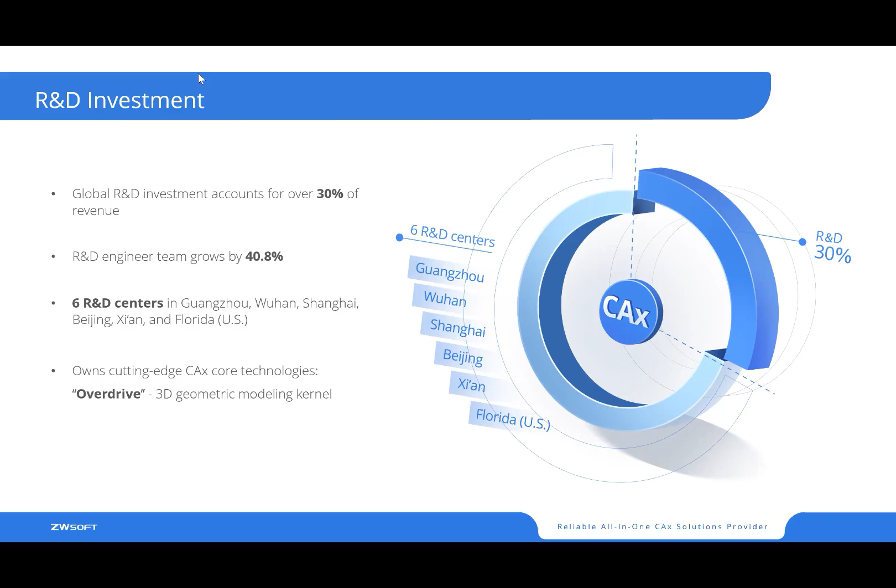We now own cutting-edge CAx core technologies. This Overdrive makes our product more stable and reliable, and this technology is one and only in China. We now have over 260 partners from over 90 countries and regions to bring our products to all the global users.

We would like to invite you all to spread the network together with us. We aim to build up a CAD ecosystem for all the customers, users, partners, third-party developers, and industry-academia research collaborations. We provide reliable products to all the users. Partners will spread the network with us. Third-party developers from various industries assist us to optimize our software functions. We also collaborate with industry-academic research to promote engineering software innovation. This strong ecosystem unites everyone together to make our industry grow faster and stronger.

Our third-party developers are from various industries, such as survey, civil, interior design, general tool, etc. For example, GTX company is one of our third-party developers, also our eco-partner too. Thanks to all the partners like you all, we've been able to build up a strong CAD ecosystem together.

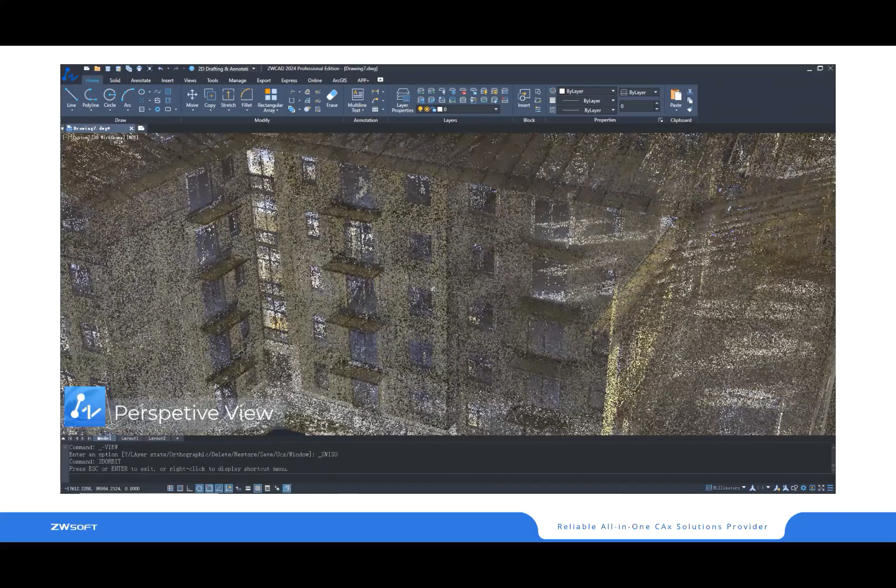ZWCAD is able to import point cloud data now. And with the enhanced 3D view, we can easily rotate the view to our desired angle. There is a plan cut panel as well as section cut for you to cut through the building, to cut through the point cloud data.

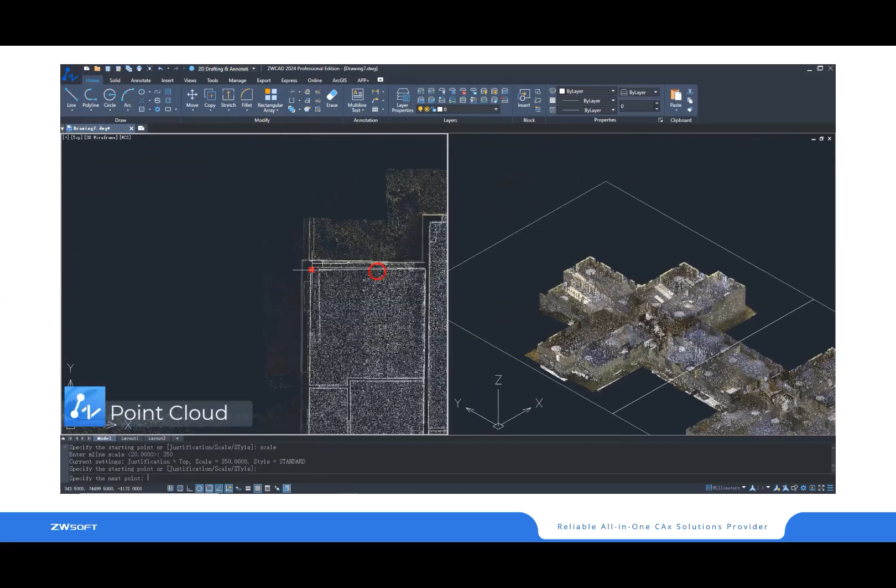So you can trace the architectural floor plan. Here in the demonstration video, you can see after we use the section cut, you can easily trace the point cloud data to create your own architectural floor plan.

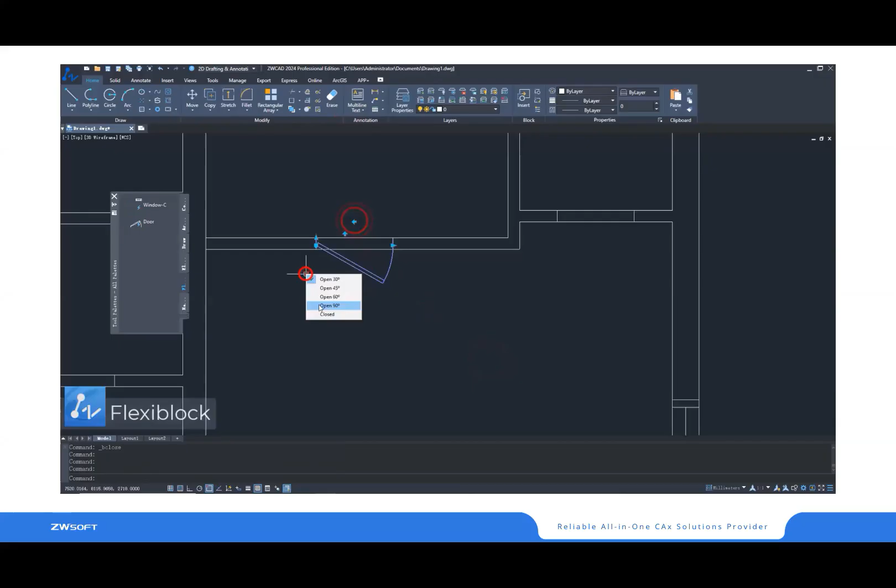And after you finish tracing the architectural floor plan, you can use the tool palette and insert the flexi block. Flexi block is a block with parameter constraints similar to the dynamic block. You can add actions to the block, and you can also change the block according to the parameter constraints.

We have also added the quick properties panel, so you can easily check and modify the color of the entity or the layer.

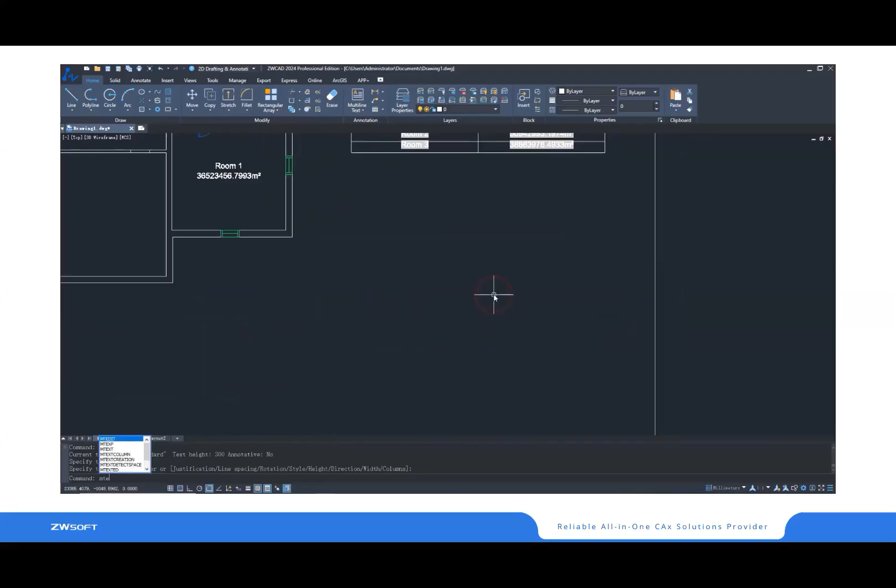With the area table for the architectural floor plan, ZWCAD can quickly calculate the room area and generate the result table. Following that, the new MText function, the multi-line text function, provides more useful tools for you to add your text descriptions.

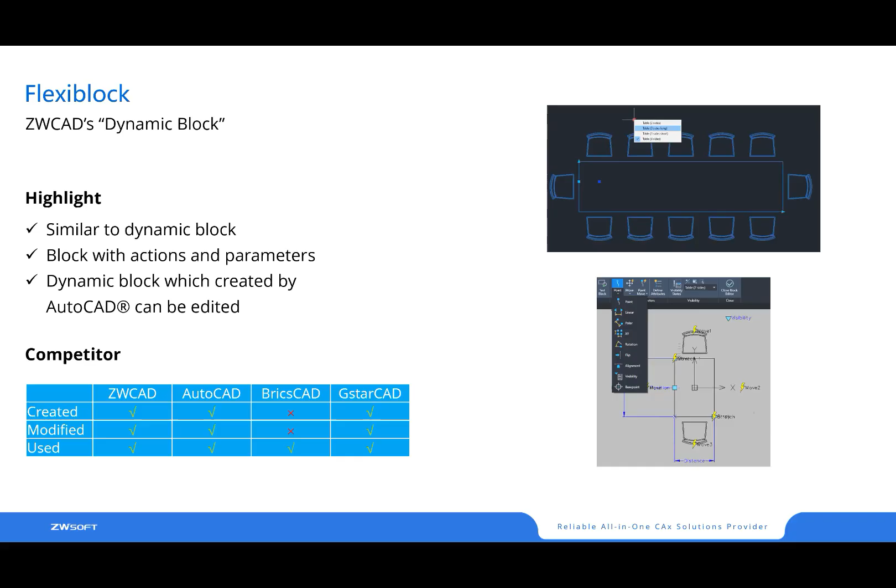After watching the overview demonstrations, the first exciting feature I would like to share is our flexi block. Flexi block is very similar to the dynamic block in AutoCAD. You can add actions and parameters to the block. And with the flexi block, now dynamic blocks imported from AutoCAD can also be modified and used in ZWCAD. Let me show you the flexi block and how to create one.

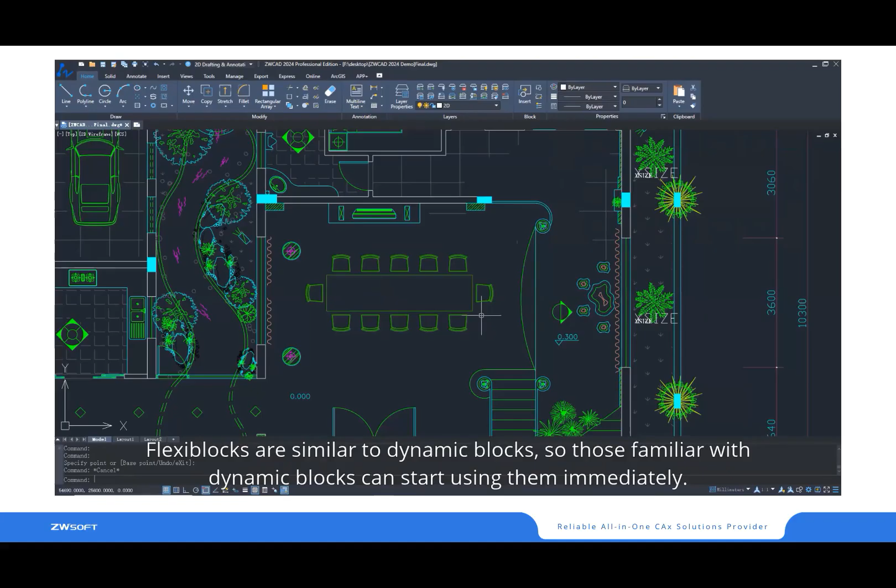This is the table with chairs on the architectural floor plan. We can adjust the table and the seats based on our needs, thanks to the flexi block in ZWCAD 2024.

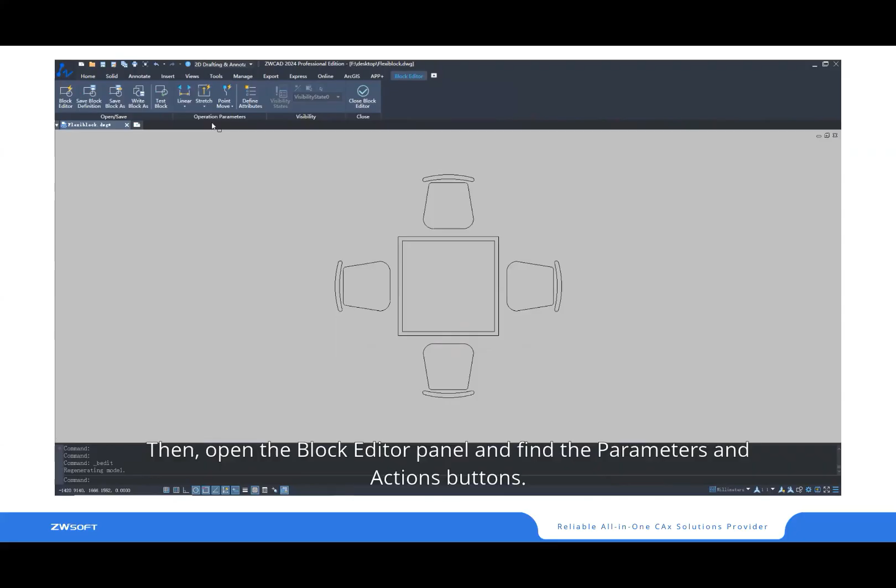To create a flexi block, first we need to create a normal regular block. Following how you create a normal regular block, you can double click into the block to enter the block editor.

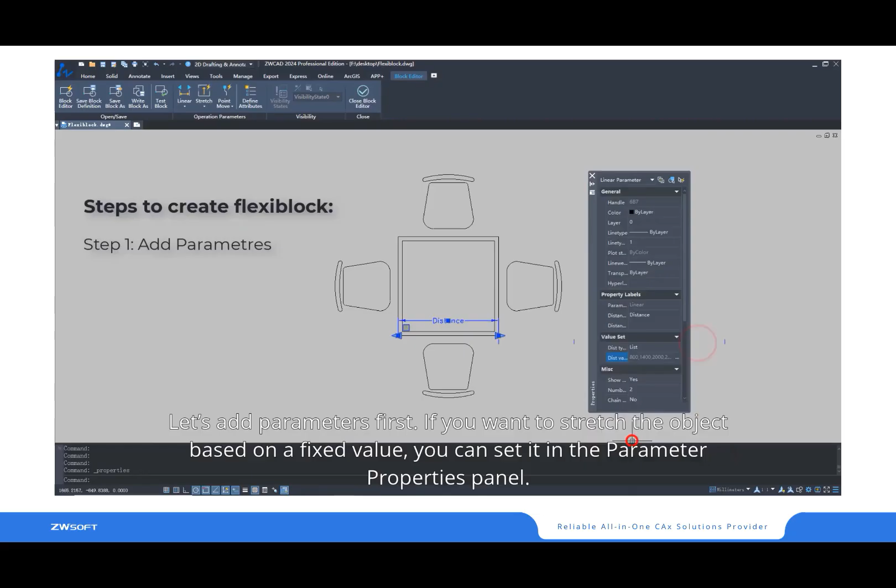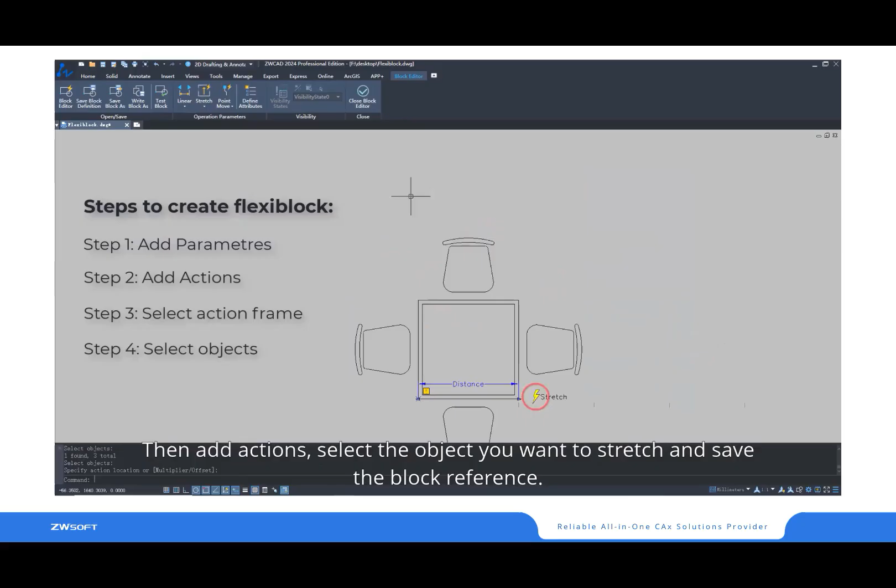Here in the block editor, we can add actions and parameters to the flexi block. Here we just add the actions with the desired distance, so that when we drop the flexi block, when we drop the table, it can automatically draw all the action or the distance.

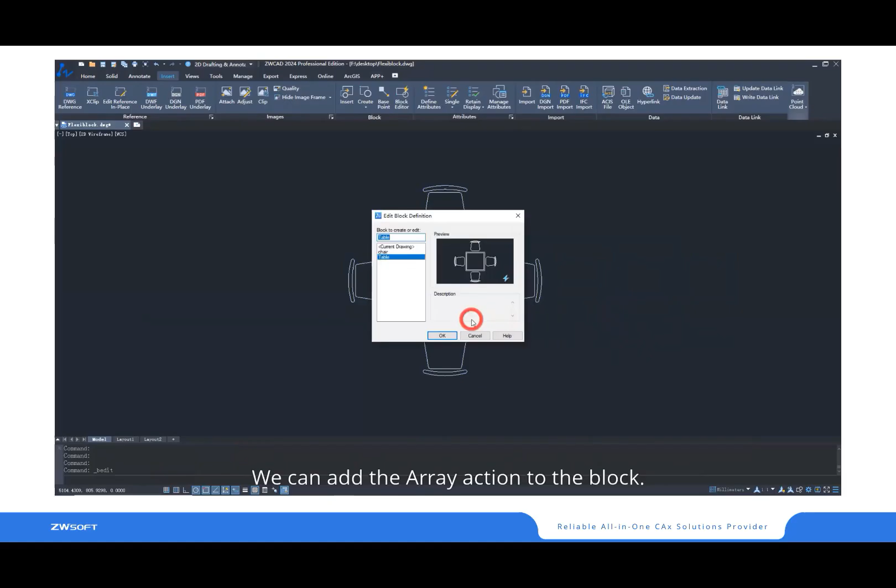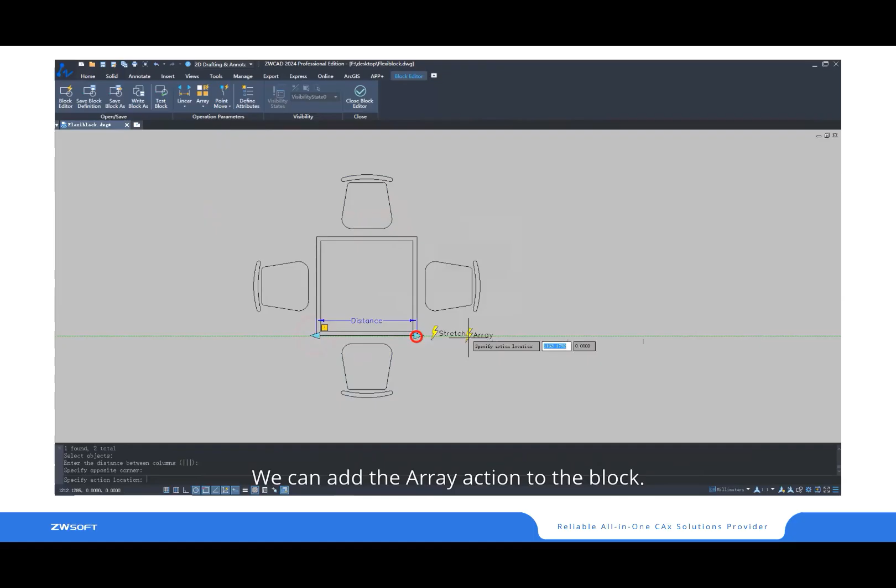And then we add the stretch actions to the table. So we finish creating the flexi block. We can test the flexi block. Now we are able to draw or stretch the table according to the distance we just added to the flexi block.

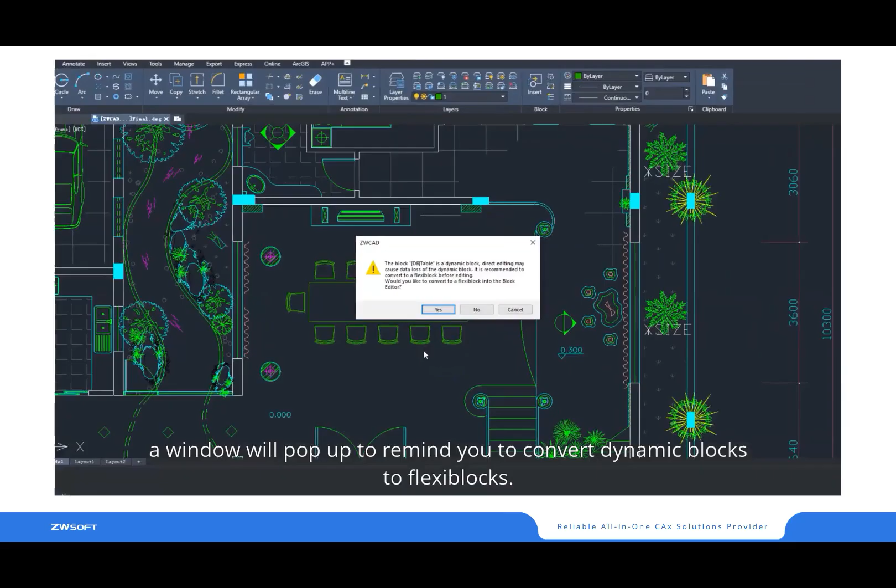And then next, we can also add the array command to the table and to the chairs.

When we test the flexi block again, when we drop the table, when we restructure the table, ZWCAD will automatically add all the chairs to the flexi block.

If the dynamic block was inserted from AutoCAD, when you double-click the block, ZWCAD will ask you to convert this block into a flexi block. You can confirm yes and modify the block as a flexi block.

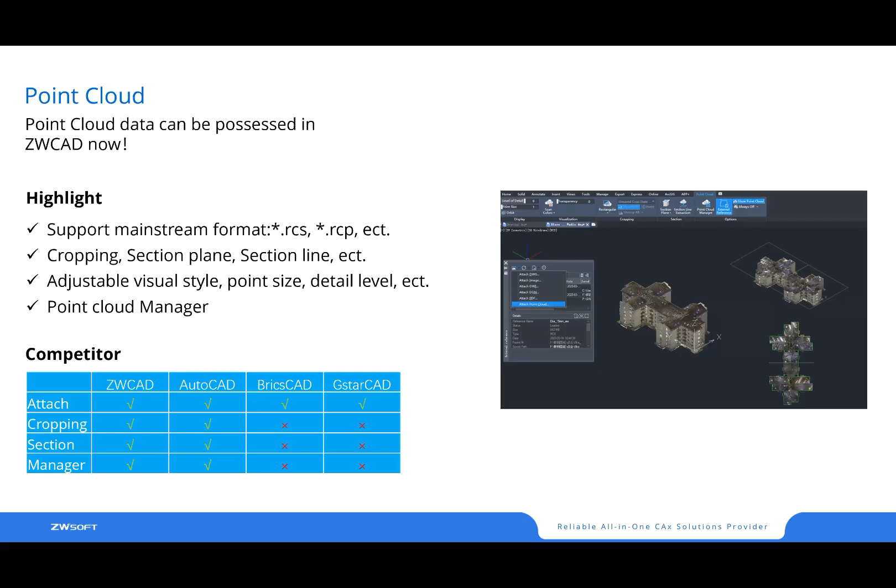The next feature to introduce is point cloud. You can now import point cloud data in ZWCAD. We support mainstream formats like RCS and RCP, and you can use cropping, section plane, and section line tools to check the point cloud data, or adjust its visual styles.

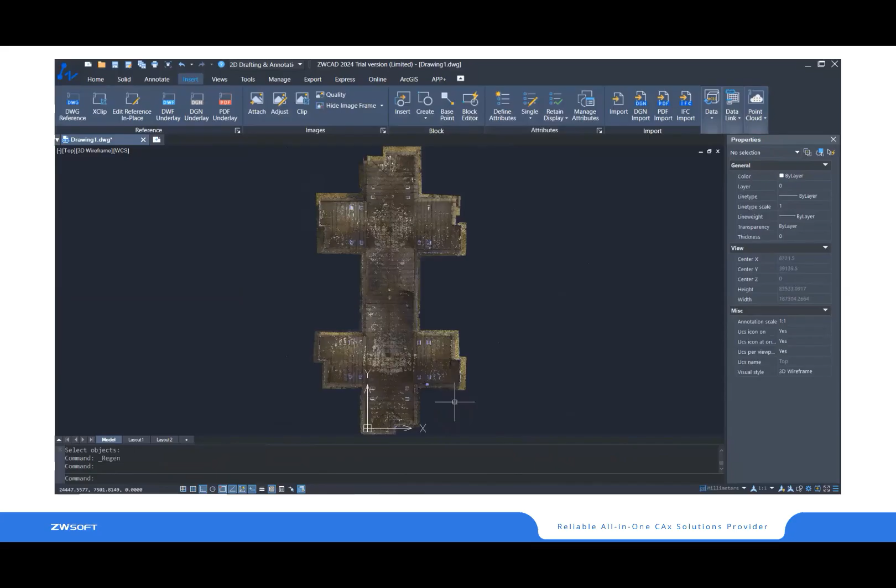Let's check out the point cloud feature. You can import the point cloud file in ZWCAD. Here, you can just attach the point cloud data to the model space.

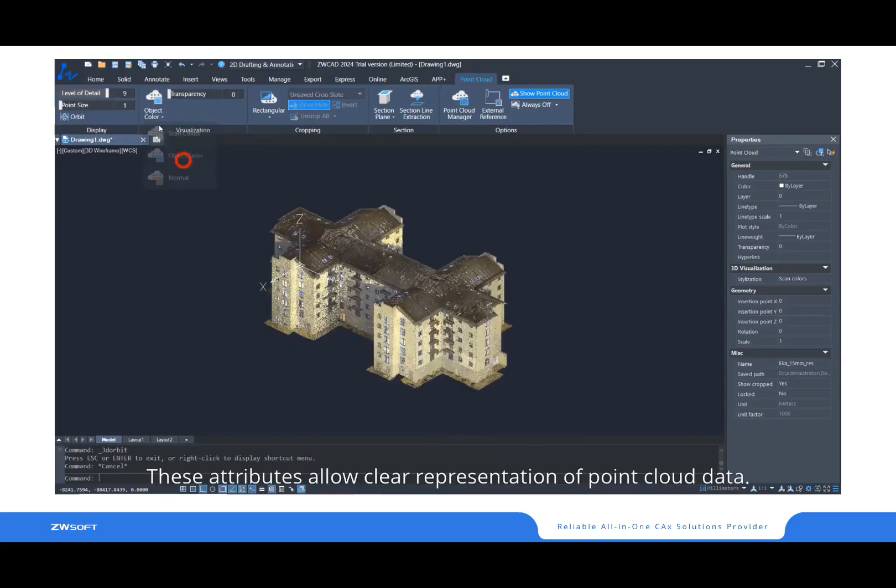We also improved our 3D rotate experience. So after you import your point cloud data, you can very smoothly rotate your 3D view to adjust it.

The point cloud data can be modified in its visual style, like the level of detail, the point size, and the transparency. You can adjust all the visual styles as your needs.

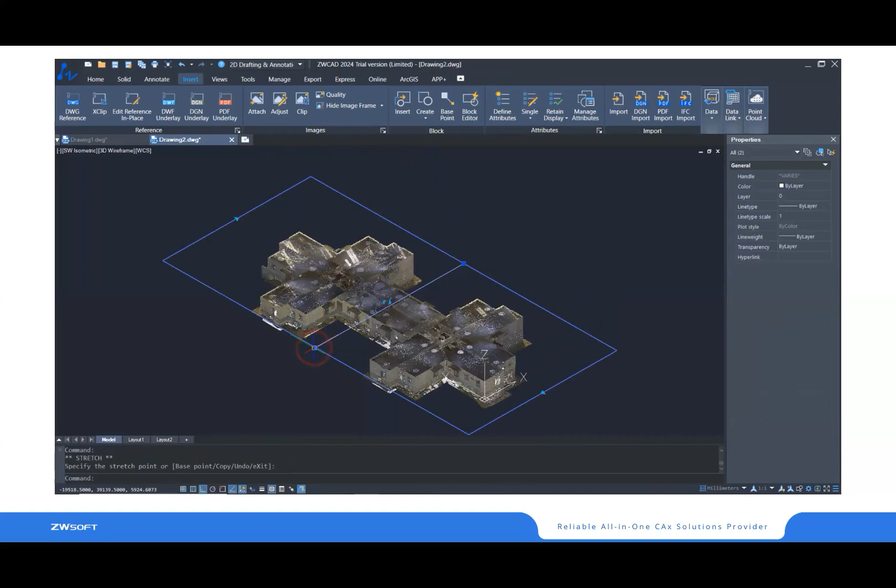You can also change the visual color for your own design style.

There are also cropping tools to create a crop area so that you can hide the other part of the point cloud data.

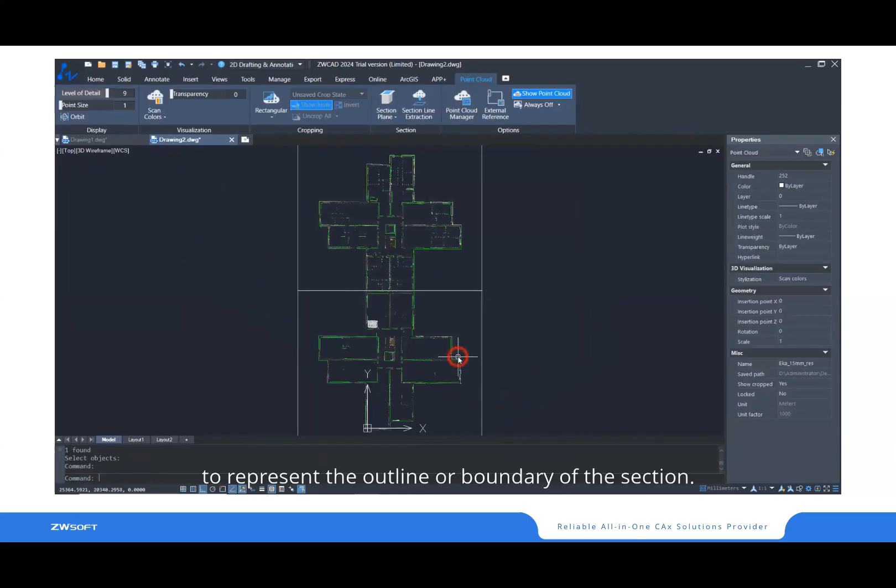We also have the section plane to create a section cut to the point cloud file, like it shows in the video, how we can cut through the building plan.

We can also adjust the height of the section cut, so we can decide which floor we want to cut through in the building.

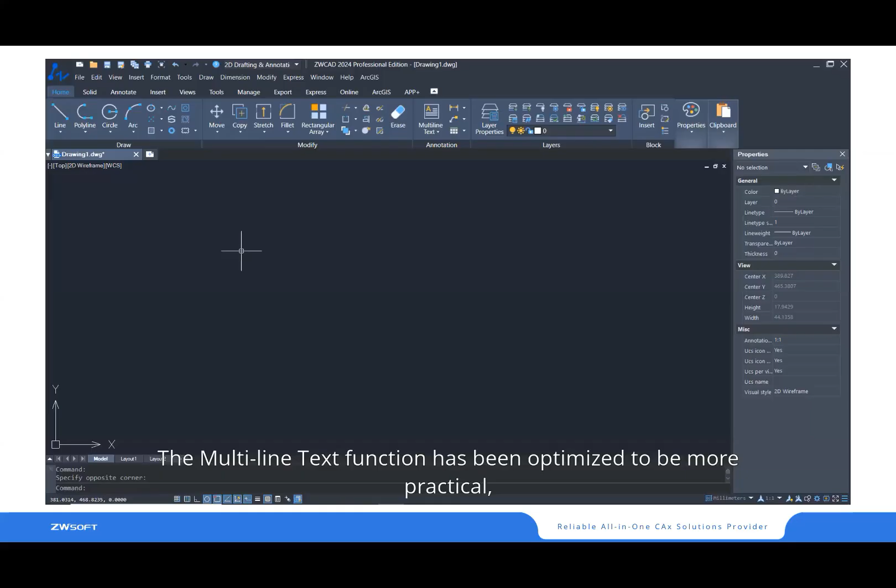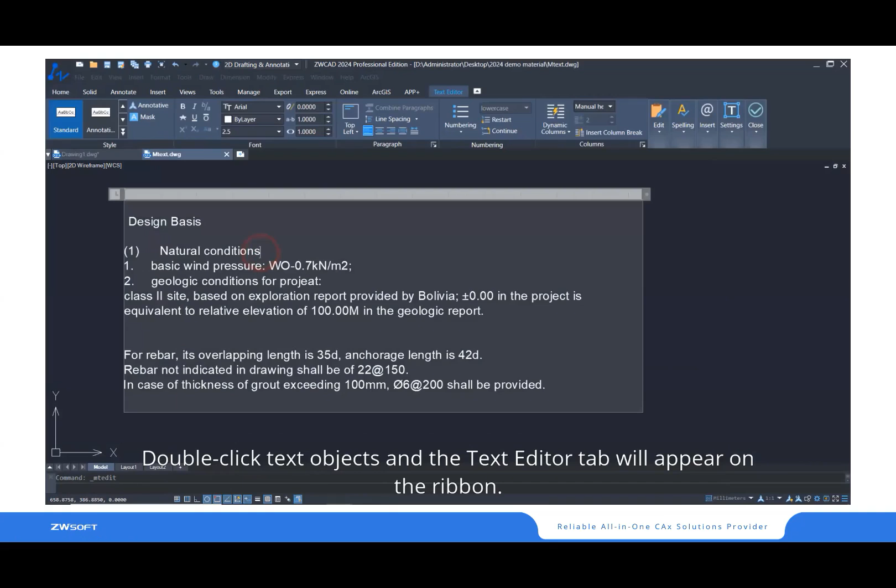With the section line tool, we can also extract the line work to create a floor plan drawing based on the section plane, so that you don't have to draw or trace the building walls. ZWCAD will automatically generate the wall for you so that you already have the building plan.

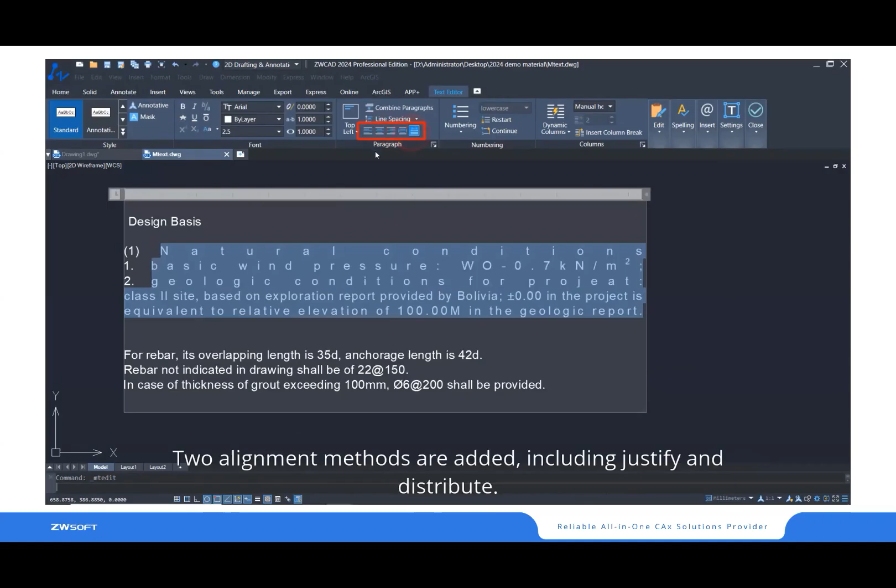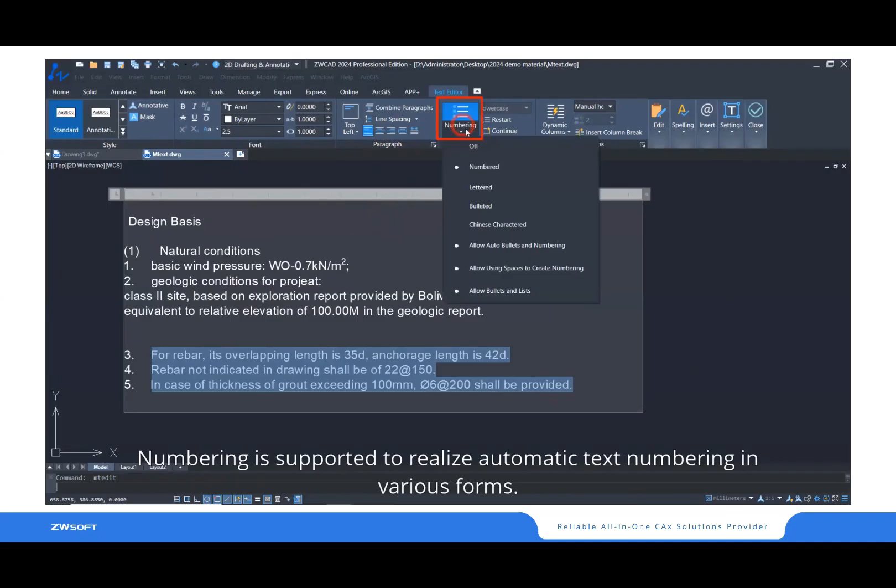ZWCAD 2024 has also enhanced the MText function, which is the multi-line text. Now we support auto-numbering function, dynamic columns, and more alignment tools for multi-line text, as well as spelling check for your text.

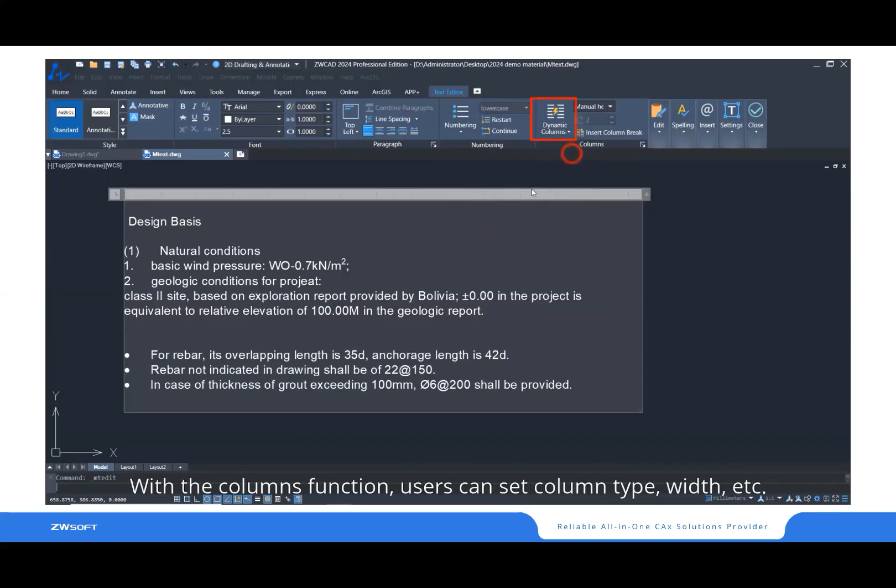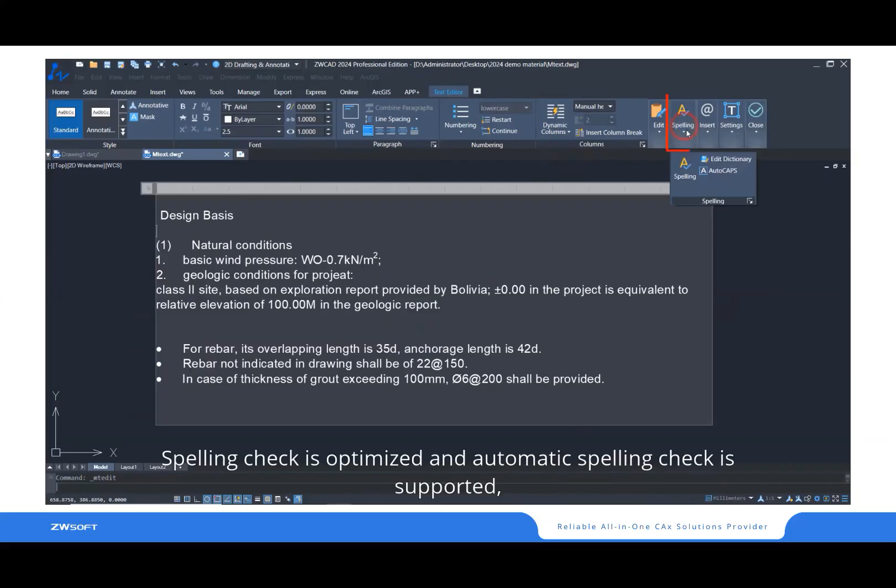Let's take a look at the MText function. Now we have expanded our text editor to the whole ribbon space, to provide you more editing tools on the top.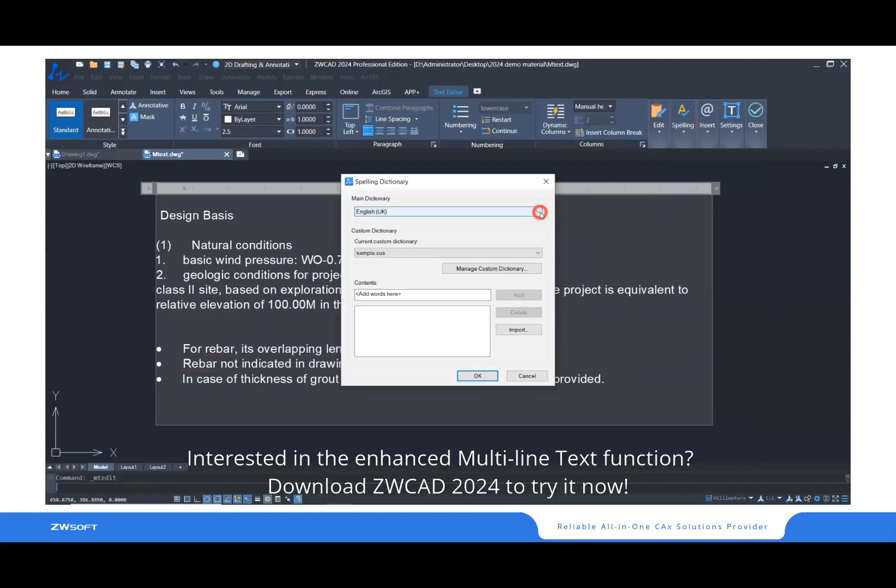ZWCAD now provides more alignment tools and also the auto-numbering function, so that you can adjust the text alignment as your desired style and create auto-numbering without inputting numbers for your rows yourself.

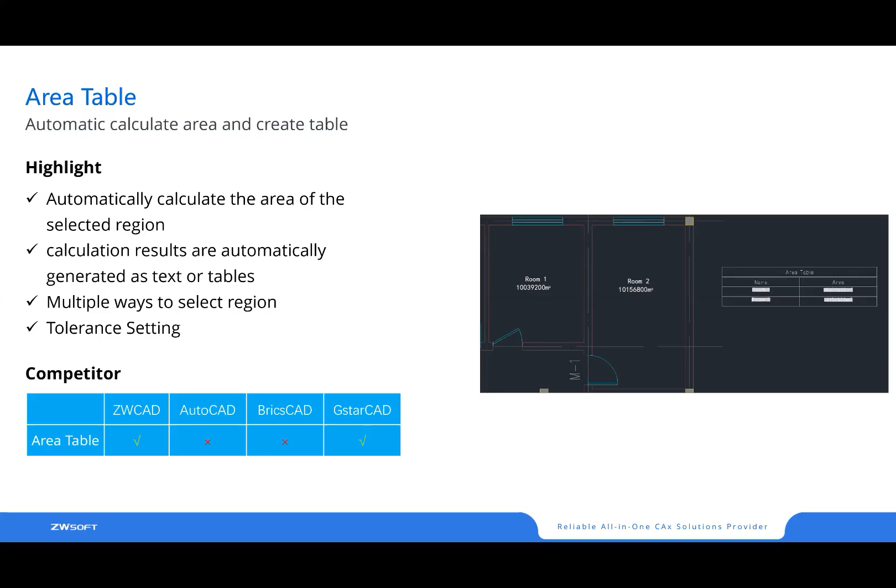You can also adjust the auto-numbering to letters or to bullets. And with dynamic columns, ZWCAD will automatically adjust the multi-line text to fit into two separate columns.

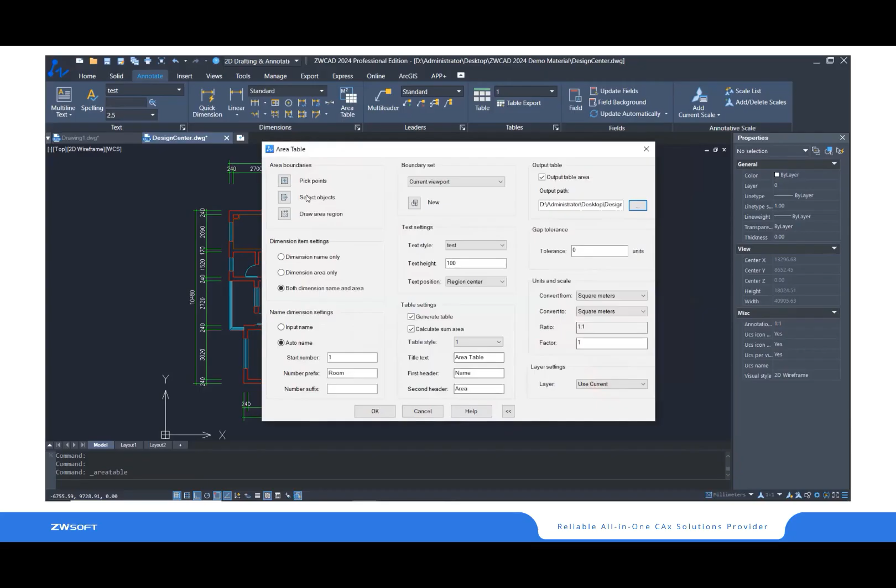We also added spelling tools so that you can check your spelling inside ZWCAD to prevent any error or typo.

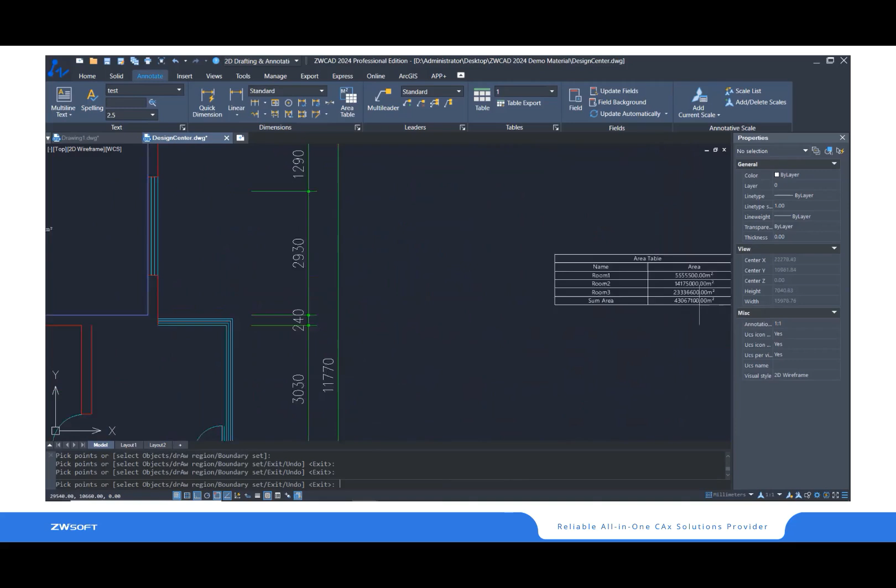Another new feature in ZWCAD 2024 is the area table, which is a very useful tool for the AEC industry. This tool helps you calculate the selected room area and generate the result table.

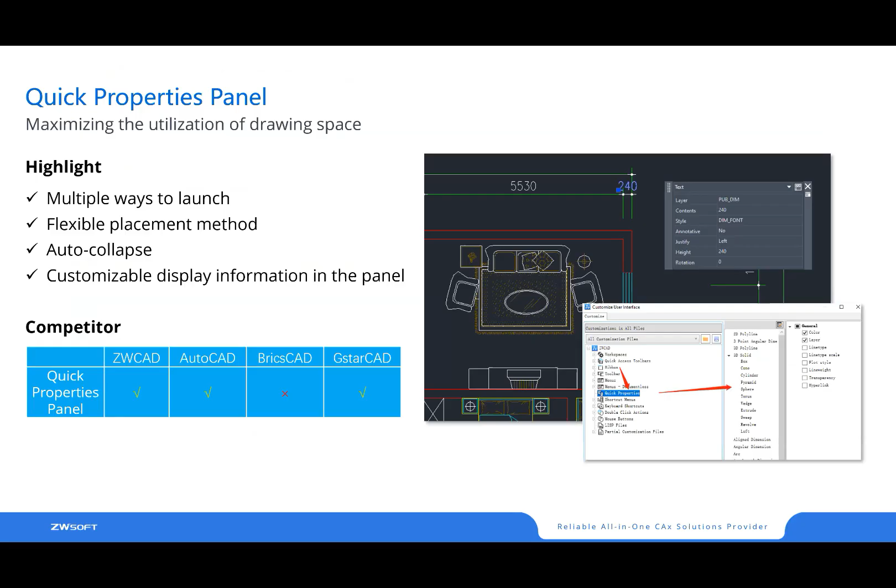We can apply the area table on this architectural floor plan and assign the export path for the result. You can choose Generate Table and then choose the path to export the Excel data to your computer.

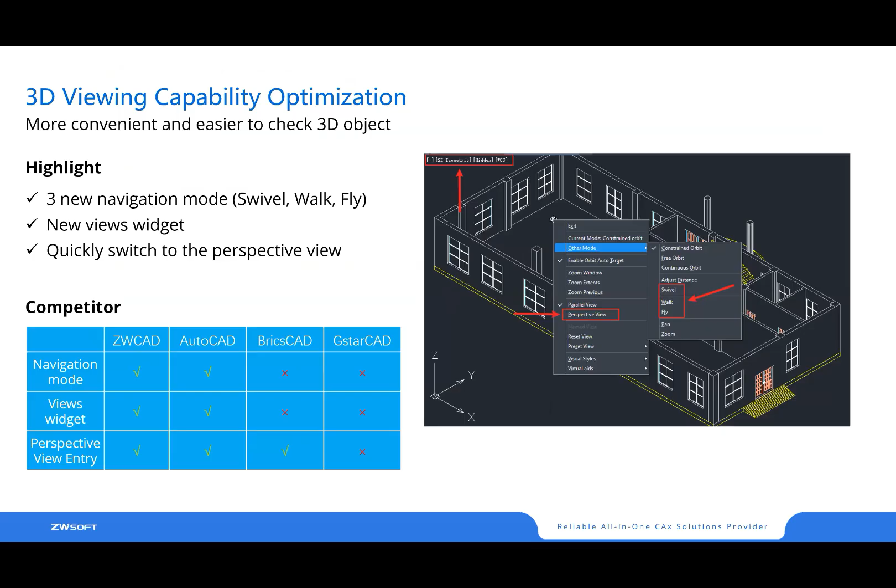When we apply the area table, ZWCAD will automatically calculate the selected area and generate the result into the table we just inserted in the model space.

With more new features, now we have our quick properties panel in ZWCAD 2024. You can maximize your drawing space by closing the original properties panel and keeping the quick properties panel.

We also improved our 3D viewing capability, as already shown in the previous demonstration video with point cloud. We are able to offer a smoother 3D rotate experience and provide more navigation modes.

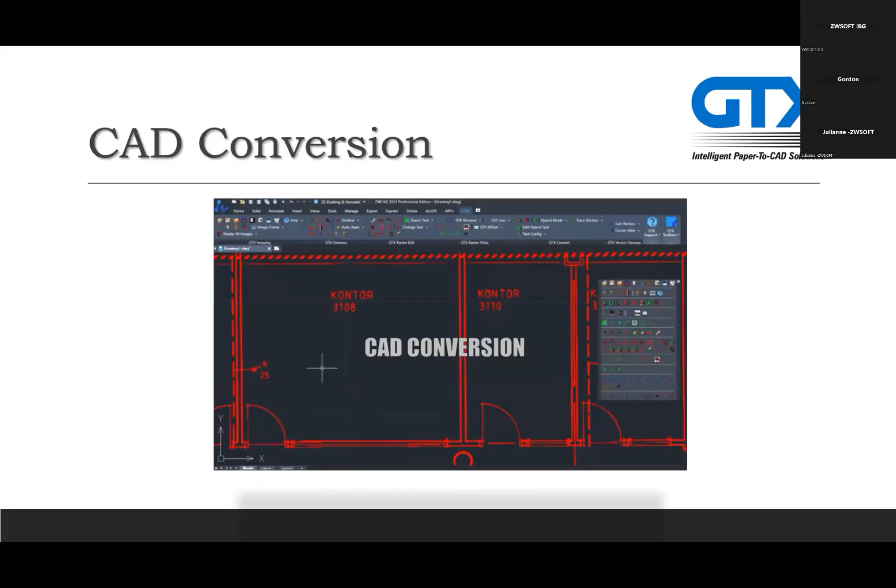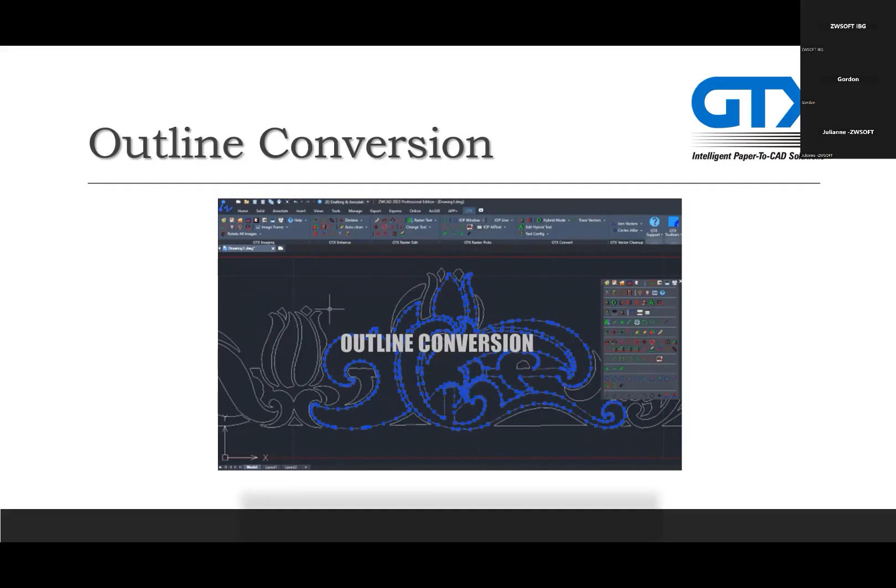We can also do shape or outline conversion. So if you've got a CNC machine or want to cut out a template or an outline of a shape, we can trace around this outline or the edge of the drawing and give you a closed polyline. That can then be saved as a DWG and you can edit it and work on it as you normally would within your CAD.

We have two products: GTXRaster CAD and GTXRaster CAD Plus. GTXRaster CAD gives you the ability to open, clean up and edit a scanned image, and as you can see, we support TIFF, CALS Group 4, and PDF. The Plus version is exactly the same as Raster CAD, but gives you the additional raster to vector conversion - going from a scanned image to a DWG. We can also do text recognition, so if you have text within the drawing, we can convert the scanned text to proper CAD text, vector text.

We support ZWCAD Professional. Our latest version is 2024, but if you have earlier versions, we can go all the way back to 2021.

We have two license options. You can either have a single user license locked to a PC, or you can have a network floating license, which is on a first come, first served basis. So you can have 1, 2, as many licenses floating on your network, GTX installed on as many PCs, and then users can access it via a network server until all the licenses are in use.

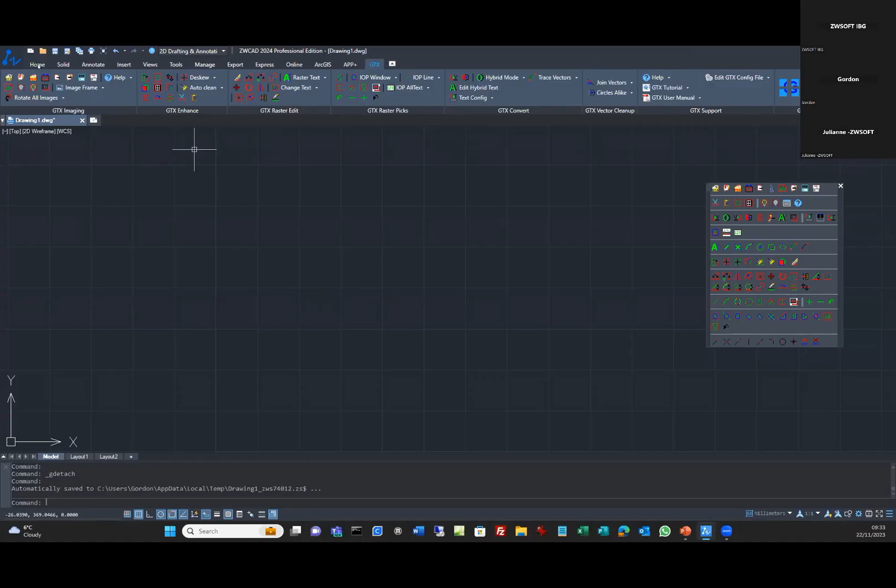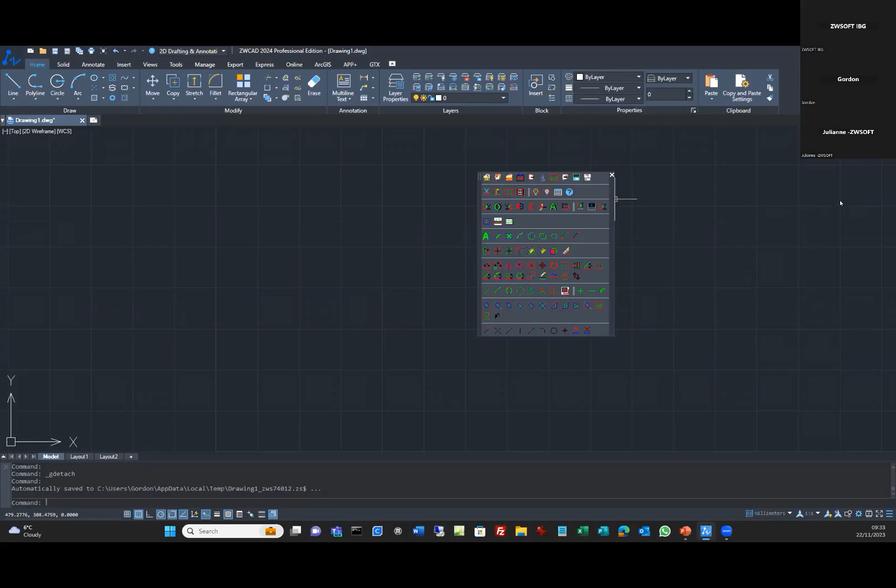So this is ZWCAD 2024, and GTX sits along the ribbon with our own toolbars and commands. So it's all sitting within the same environment. We also have toolbars that can be displayed. So this is our main toolbar, and it has all of the GTX commands that you'd want to do, from opening, editing, converting, saving. So you can either have it off of a drop-down menu, or you can open up individual toolbars. It's entirely up to yourself.

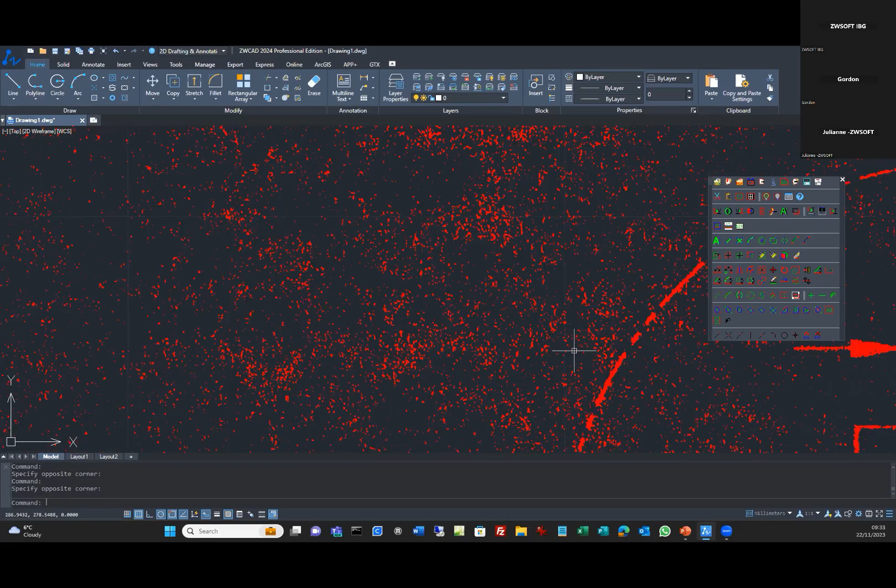So the first thing I'm going to do is open up a scanned image. This one is a particularly dirty image. It's got lots of background noise, got lots of speckles within the drawing. If I zoom in, you can see it's all speckles. I can't grip on it. It's just dots on the screen. What I want to do first is get rid of all that background noise. So we have various methods to do this.

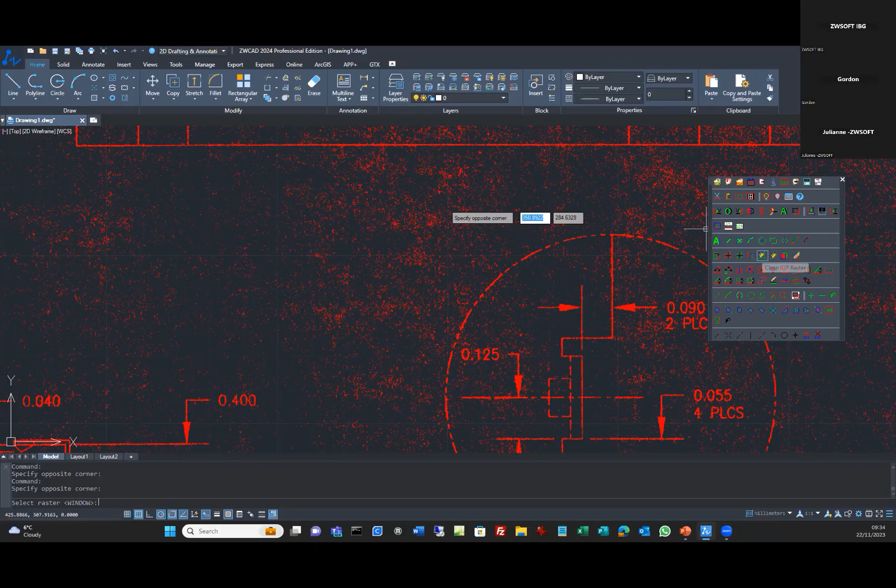We can either despeckle, so you choose a speckle size and apply it to the drawing, or we have a cleanup command that will either show you what it's going to erase, or we can just automatically get rid of the data. So if I use this one here, everything that goes green is going to be removed from the drawing. You can see that there's still some large data that's still red. That could be like a decimal point, could be some sort of quote or something within the drawing. So it looks at speckle sizes and thinks, okay, well, that could be data.

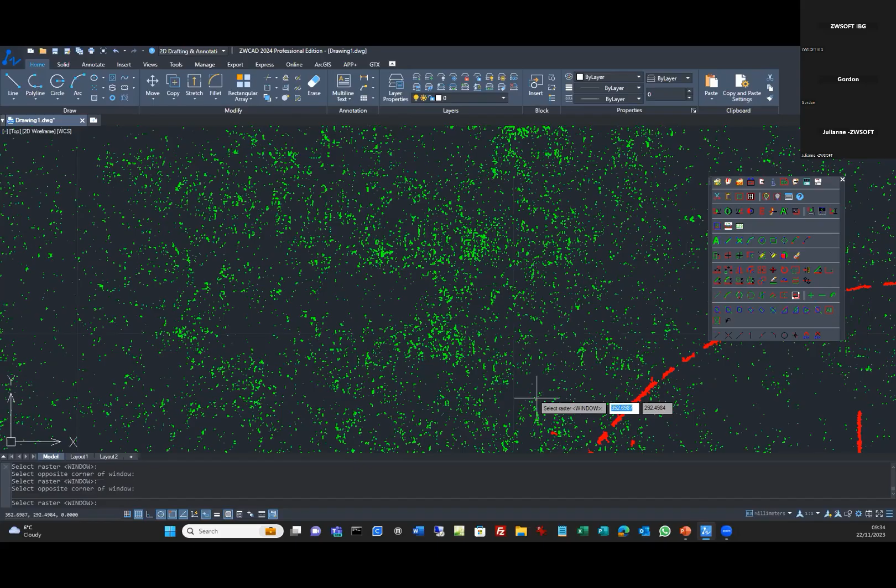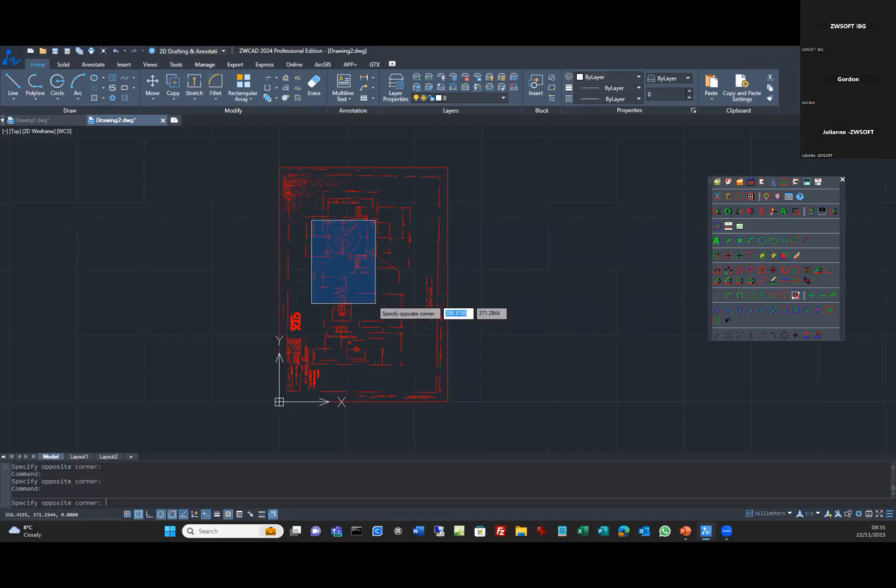We can actually still add, because we're in the selection method, so I can keep adding items to the selection. So everything that's green is going to be removed from the drawing. Hit return, and there you have a nice clean drawing that you can actually read and start working with. I'll open up another drawing. This one is a scanned image. So, like I say, I can't click on it, I can't edit it or do anything with the drawing. So the first thing I want to do is turn it through 90 degrees so it's square within the drawing frame.

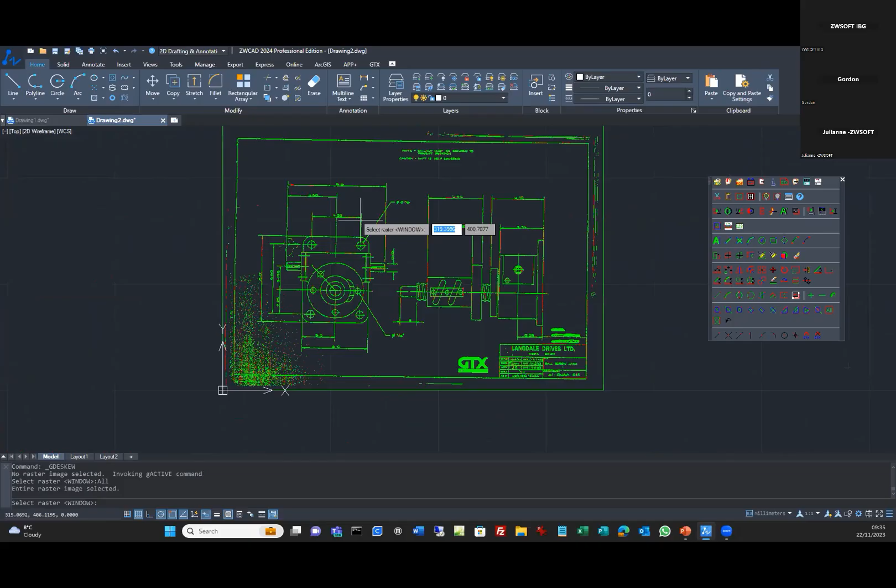Also, you can see it needs to be deskewed because it's actually not square. So we have a deskew command where I can select all of the data and then I can deskew it so it's nice and square. So I pick a line. You can use the drawing border, or you can use a center line within the drawing itself. So now the drawing's nice and square. I can crop the data around the drawing. So if I've got plan file strips or data around it that I don't want to keep, it doesn't resize it. It just takes away the data around the outside.

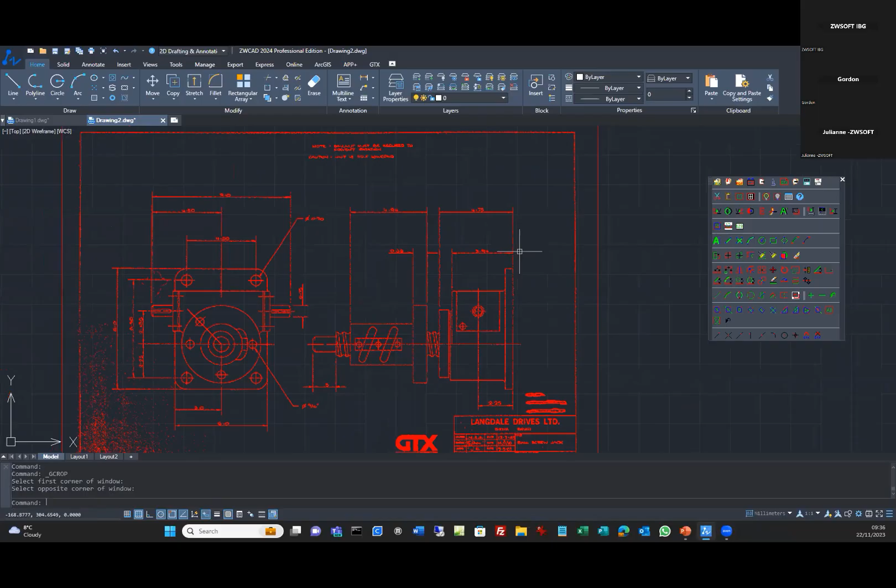We have speckles here in the corner. I can use the cleanup command to get rid of them. And obviously there's still some larger speckles that are left remaining, as well as this like tear or crease within the drawing. We have an erase function that we can erase individually selected data. So if I say erase, we have these selection methods.

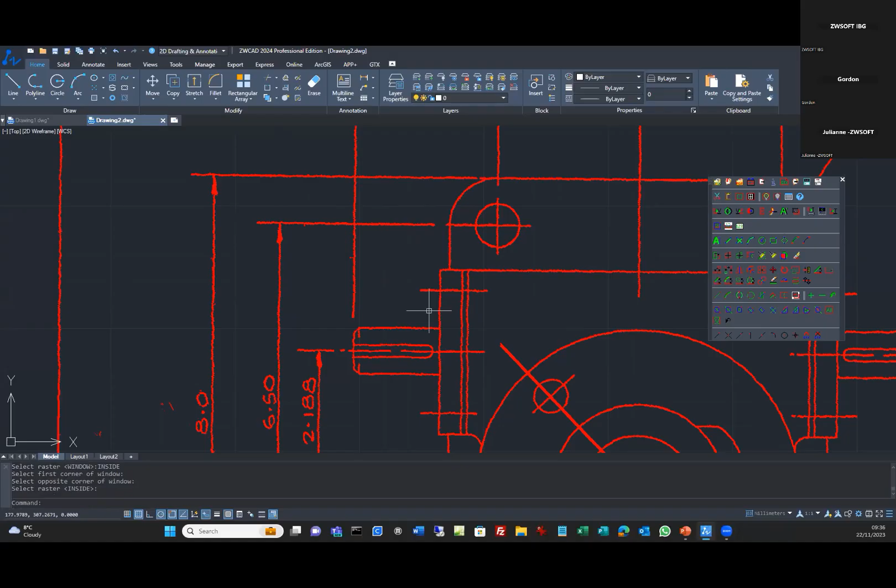So we can use either a cutting window, a crossing window, or if I use this one called inside, and I just draw a box around the data there, anything that's going within or is touching and going out of the box will be left alone. Everything that's all on its own will be highlighted, and then I can get rid of it. So it's a very quick way to get the drawing nice and square and nice and clean. As I said, it's still scanned data, so I haven't converted anything within the drawing.

And say, for instance, the modification you want to do is rotate this hole through to 90 degrees. Just to do that simple modification, you don't have to redraw the drawing from scratch. So we have these edit tools along here. So I can say rotate, I can pick my data that I want to work with, so it goes green. So I choose the line, I then choose the hole. So that's everything that I want to work with. So I hit return to move on through the command.

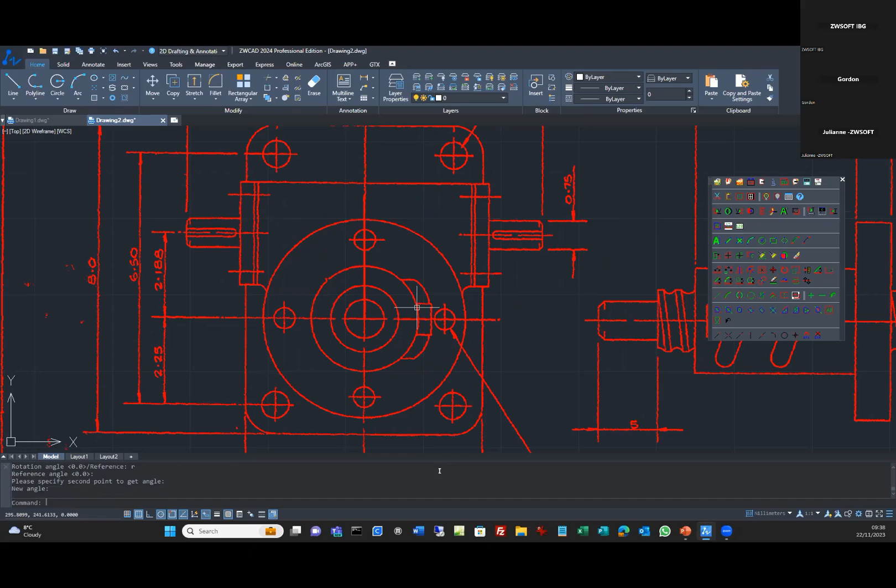It says, right, give me a base point and give me a reference angle. Well, I don't know what it is, so I'm going to type R for reference and say, right, that's my reference angle, move it through to 90 degrees. Do I want to delete the old objects? Yes. So it's now moved that hole through to 90 degrees. Like I say, it's still a scanned image. I haven't changed anything, or I haven't altered anything within the drawing.

We have the ability to make copies of items. So for instance, here, there's a hole here. If I want to make a copy, I can make multiple copies. I can say, right, okay, I want to put one there, there, there. So you can actually make multiple copies of an object.

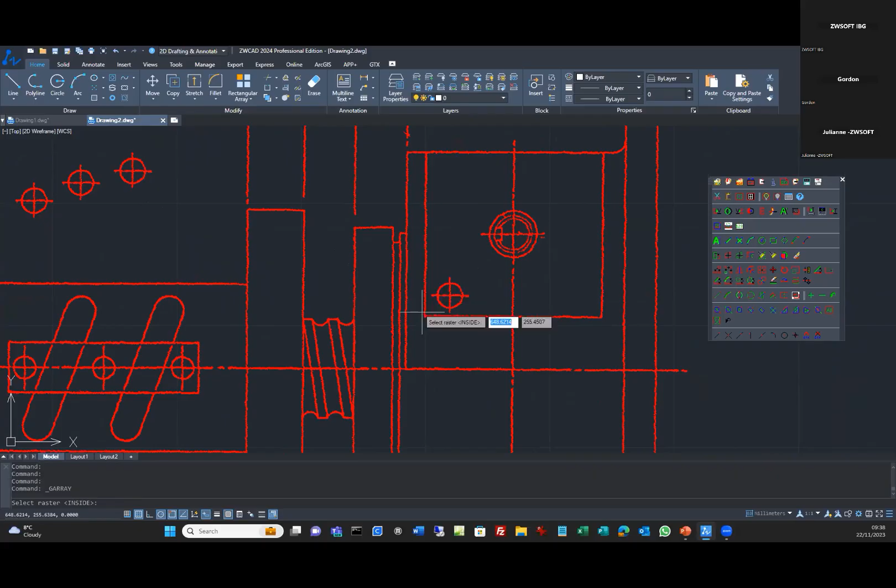If I wanted to place one on this actual plate here, I could do it by eye, I could do it by distance, or I can make an array of an object. So I pick my item, I want to do 2 rows by 2 columns, and I know that the distance between the two is 50. Say okay, and it's now positioned that equal distance apart as per my instructions.

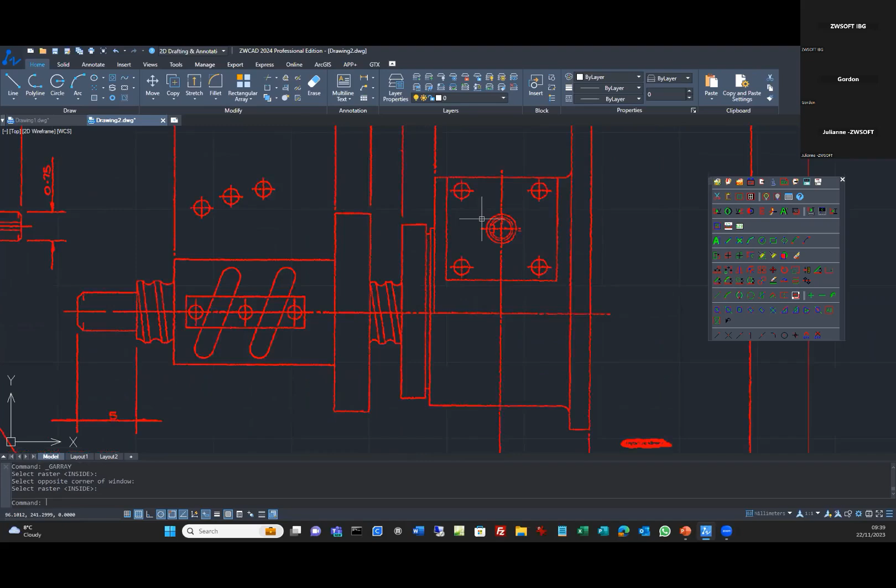So there's lots of things that we can do within the software. We can mirror objects, we can move objects. So there's lots of editing commands that you can do within the drawing. I'll open up another one. This is just to give you a bit more of an idea as to what we can do as far as conversion. So this is a building layout.

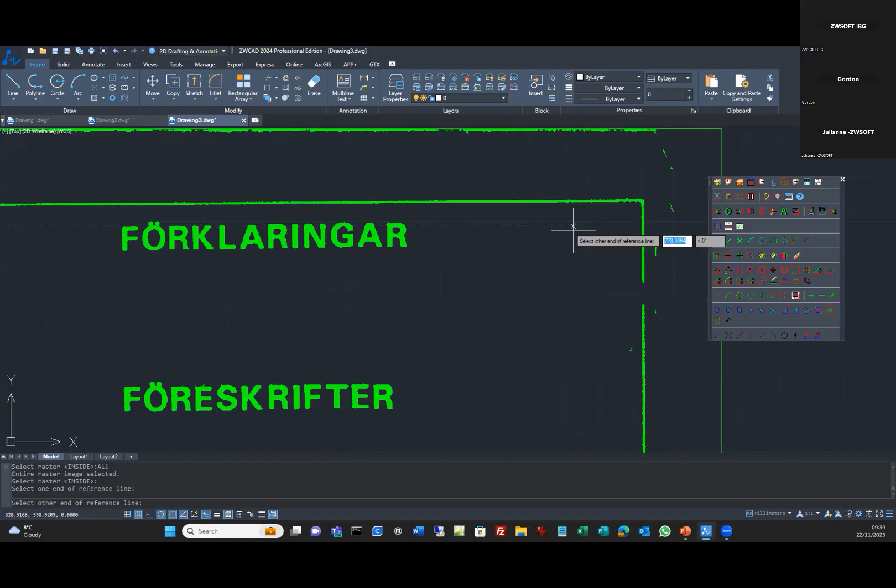Like I say, it doesn't matter what type of drawing it is. I want to make sure that it's de-skewed first, so it's all nice and square. So I de-skew the image itself. So I pick my line. So it's now de-skewed. We have some ducting along here, which looks like it's all stippled. It could have been some sort of tape or something on the original.

So what I want to do is get rid of this ducting, because I want to change or repair some of the data within the drawing. So if I say erase, use the inside command again, just draw a box around this data. Everything that's on its own will be highlighted and I can get rid of it. Because if I was to convert this arc or this doorway, then I'd have 2 arcs because there's a break between the two. So I can either repair it before I convert it or after. I'm going to repair it before I convert it.

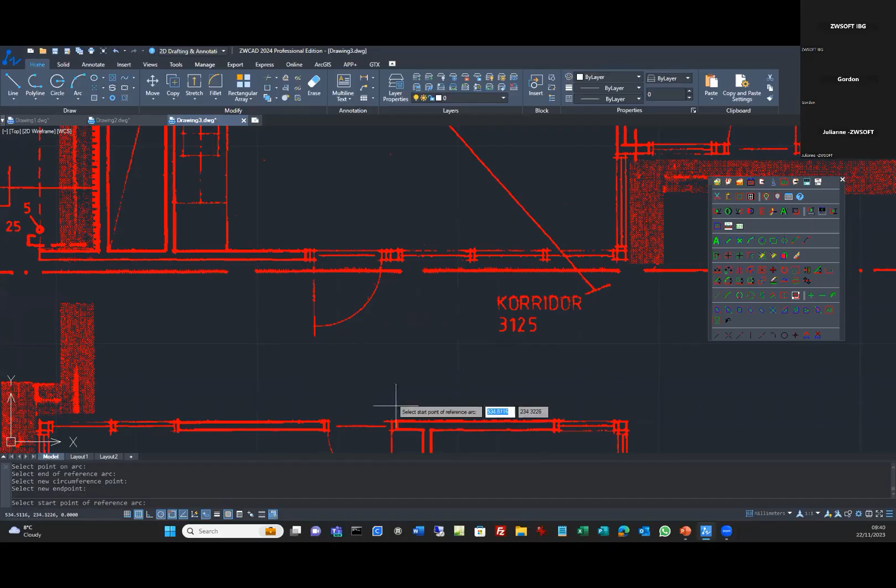So we have a command called change. And if I say change an arc, I can then pick 3 points on the arc and then pick a circumference point and a new end point, and it redraws the arc. So it's now solid. We have a line here that's also broken. So I can say change a line. I can pick my line and then it will take the average thickness of that line and redraw it across. So now when I convert it, that will be a nice solid line.

If one of the changes you wanted to make was to take these 2 rooms and make it one, I can say erase, pick a line. I can say, right, pick that line there, pick that line there. I can change it to a window and say, right, get rid of that text and get rid of that doorway. So everything that's green is going to be removed. I can move my text into the center of the room. And I also can make reference to the old room number.

So I can change the text. So I give a baseline, select my text, give it a height, and then type in my new text that I want to use. And now we've got the proper text on the drawing. Like I say, it's still as a scanned image. I haven't converted anything.

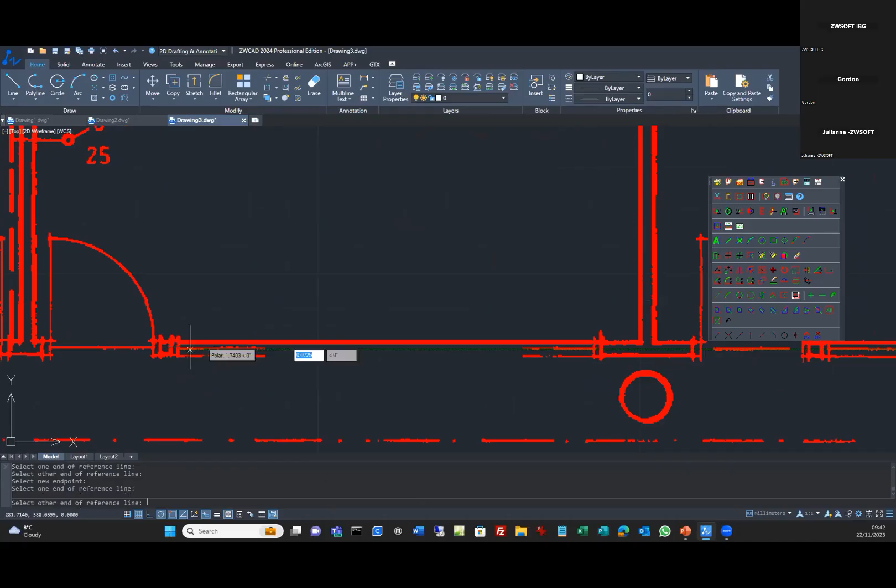And then I can repair my lines in my wall and say, right, bring that line across to there, bring that line across to there, bring that line across to there. So you could save that now as a TIFF or as a PDF, and that would be your new edit to your drawing, if that's all you want to do to it. So, like I say, there's lots more raster editing commands that we can do. But to move on, I'll show you some of the conversion.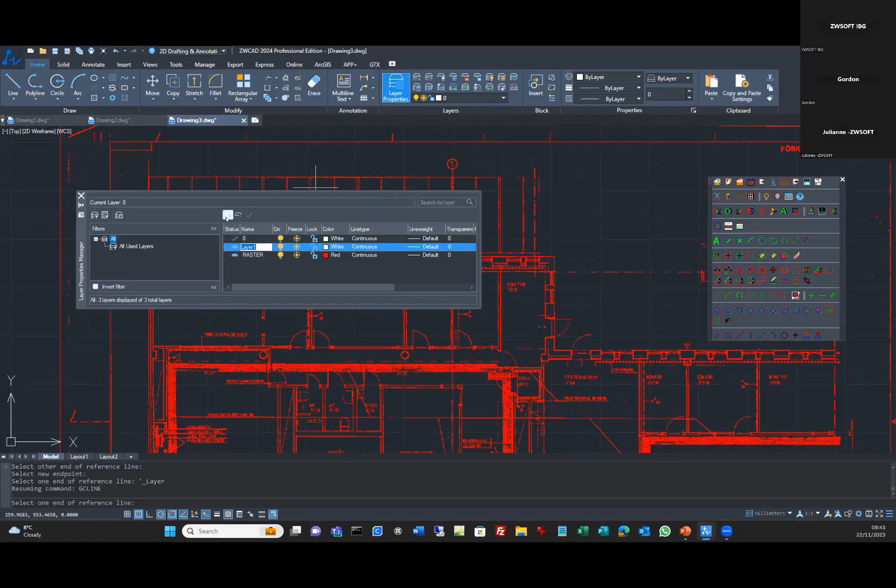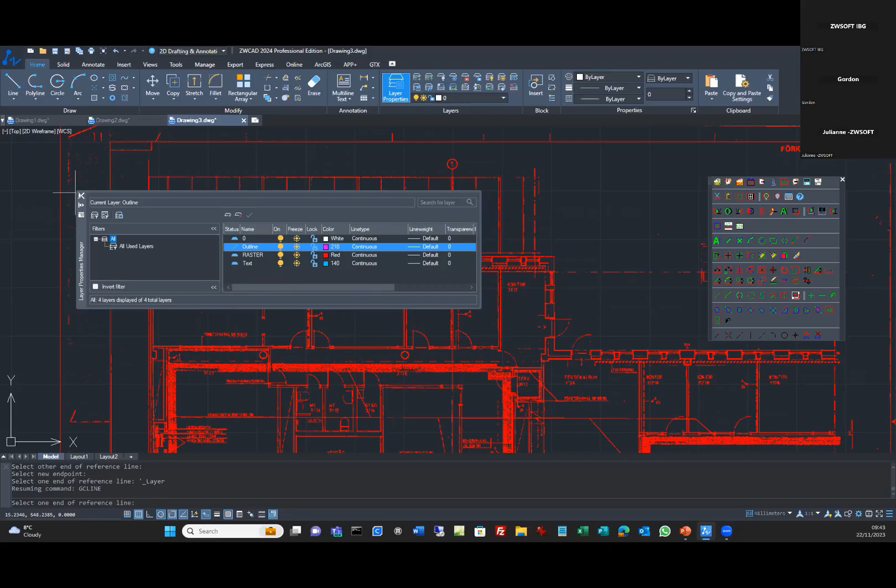So what I want to do is I want to create 2 new layers. I'm going to call one outline, give it a nice vibrant color so that everyone can see it. And I'm going to create a new one called text. So I've created two different layers. So my outline is my current layer. So everything that I convert now or pick now will go onto that layer.

So we have commands called raster to vector. So this is going from a scanned image into DWG. I can use a selection method called fence. And if I just draw a line through the middle of this drawing here, it will follow those lines until it finds a break. So everything that's green is now selected and going to be converted.

I can keep adding some more until I'm happy with all the selected data that I have. I can then hit return and you get a simple conversion dialog. We can do CAD or contour.

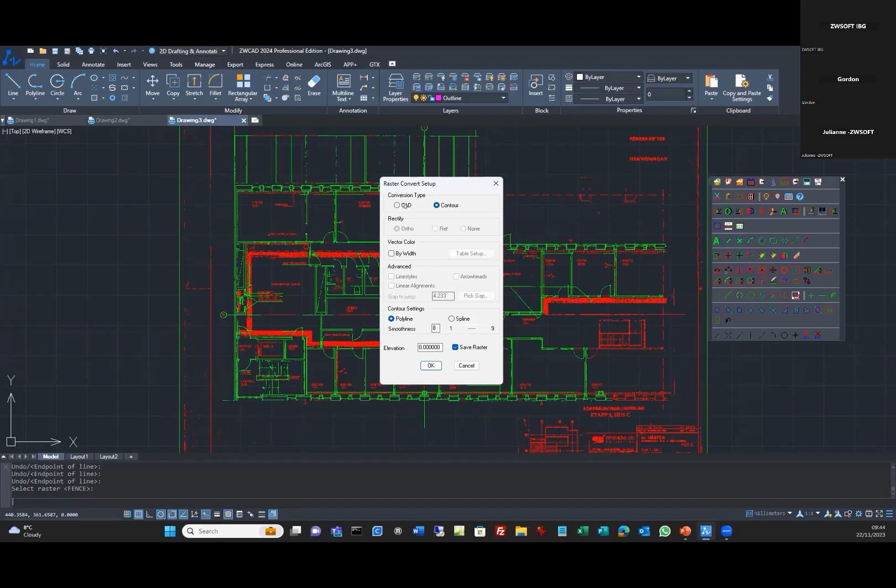CAD is lines, circles and arcs. Contour is polylines and splines. I say CAD, want to keep them all orthogonal. I don't want to save the raster, say OK. So now everything that's purple is now DWG. So these are all now proper lines, arcs and circles. If I turn off my raster layer, you can see that everything there is now DWG.

If you had to redraw that from scratch or start to trace or overlay, that would take a very, very long time to get to this stage as we are now. It took seconds. So now what's left is the text. So I'm going to set my text layer as current.

Because I've got different text heights and different orientations, you want to measure it. So you can use the distance command to measure the data first, because when I go into my text conversion setup, we have a minimum input size and we also have a minimum output size. So I want to do 0 degrees first. I know that there's 2.5 mil text as well. We can do word or character recognition.

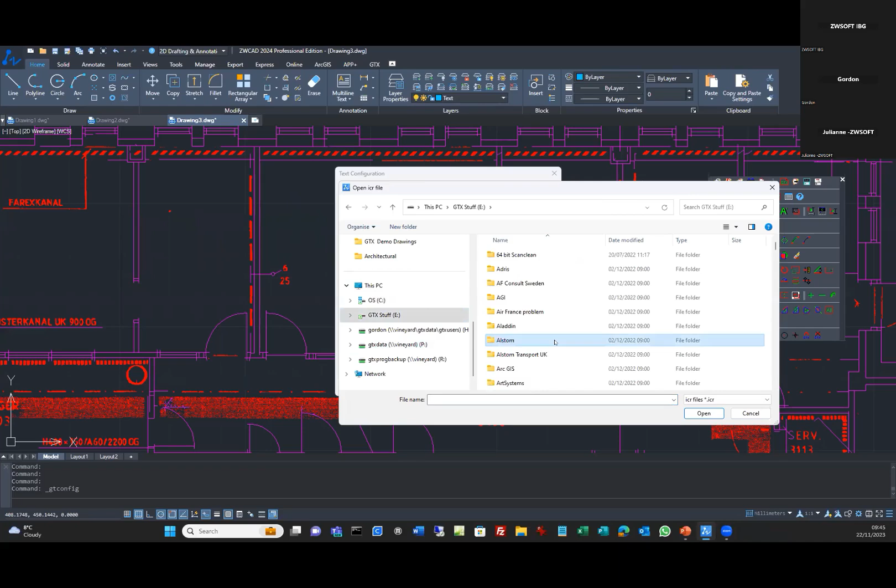I don't want to save the raster, and because we're doing characters, I'm going to open up a file which I've already trained on this drawing. It's called an ICR file. It's a character recognition file. So this has already been trained on some of the text, but I'm going to leave it at 100%. So it's going to ask me for every character just to show you what it will do.

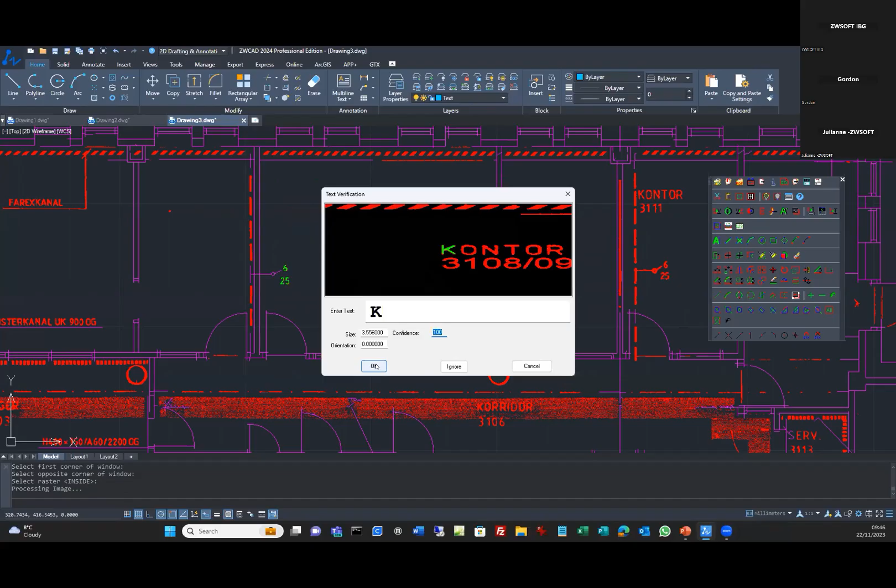So now I can pick my text that I want to convert. So I'm just going to pick this bit of text here. Because this has already been trained, it sees that character, it knows what it is, and it's 100% sure. So I say, okay, you got that right. Yeah, that's an O, that's an N, that's a T, O, R, 3, 1, 0, 8, slash, 0, 9, 6, 2, 5. So now it's converted that to proper editable text.

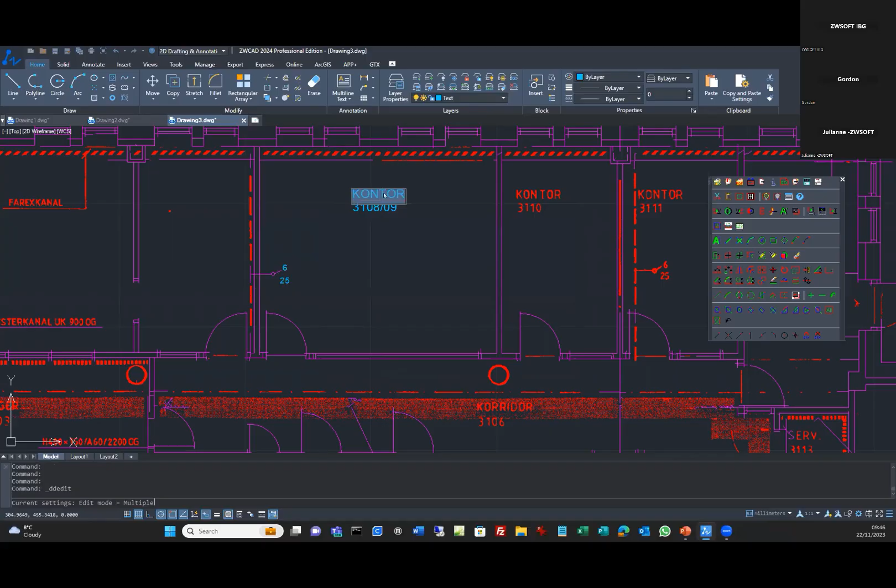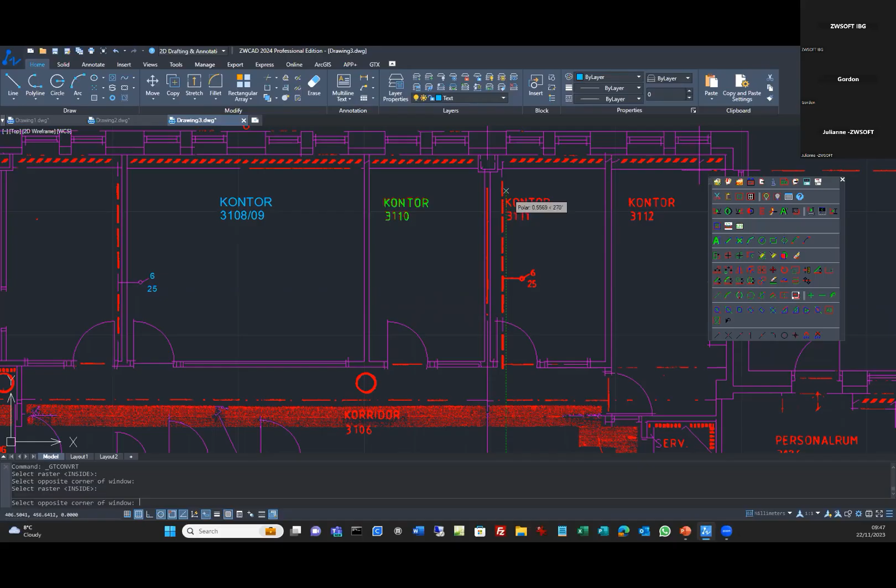Didn't have to worry about the position of it, retype it, delete, anything else. It knew exactly what it was. So once you've trained your character recognition file, you can see what its threshold is and say, right, okay, anything over 80%, I'm going to let you do what you want to do. So I now pick some more text. That not there, pick that there, okay. So I'm going to pick those bits of text there, hit return, and it's done it.

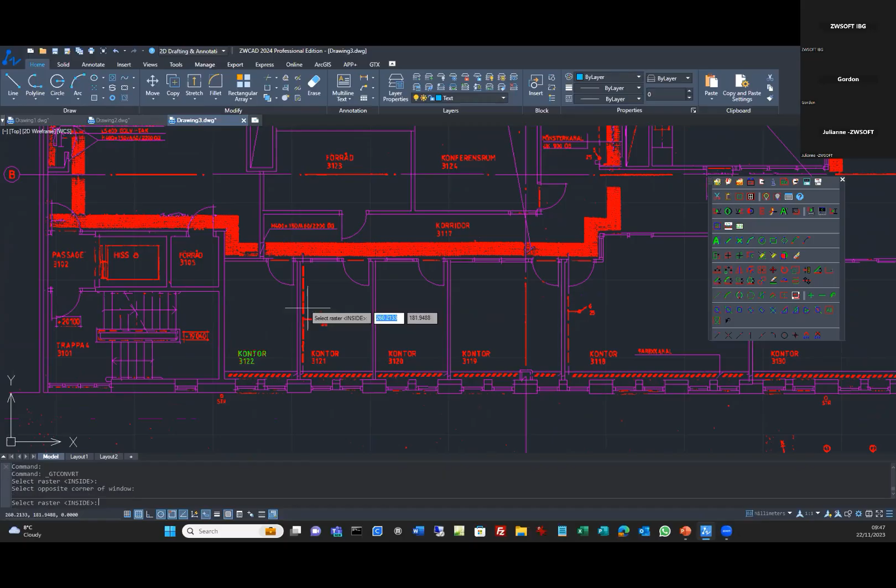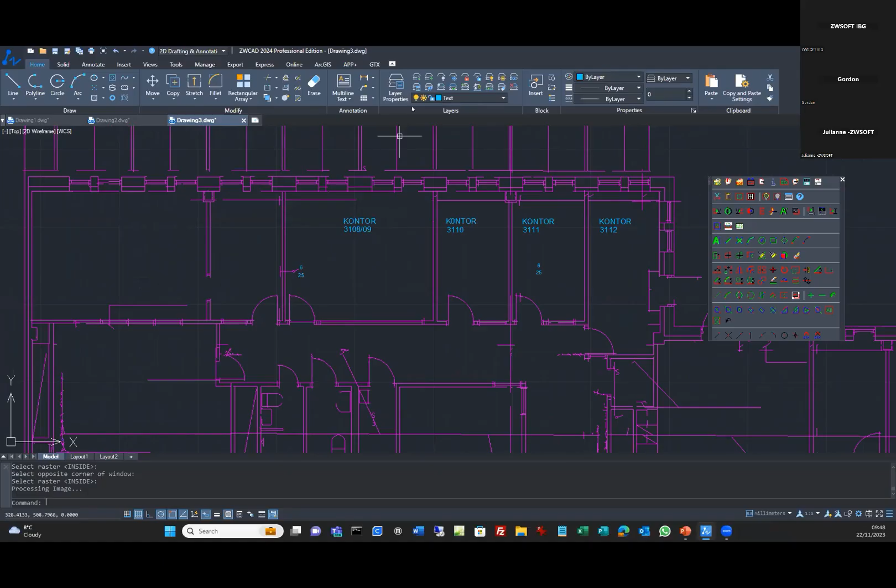Because it knows what the characters are and the text is, I can go around more of the drawing. And because it's the same characters, I can just keep on selecting the different bits of text that I want to convert. And then you have your drawing. So within a couple of minutes, I've now got a DWG file that contains proper text and lines, circles and arcs. So I've got all of my building layout and also my text that I want to use. So it's a very, very quick way to manipulate and change and convert your data.

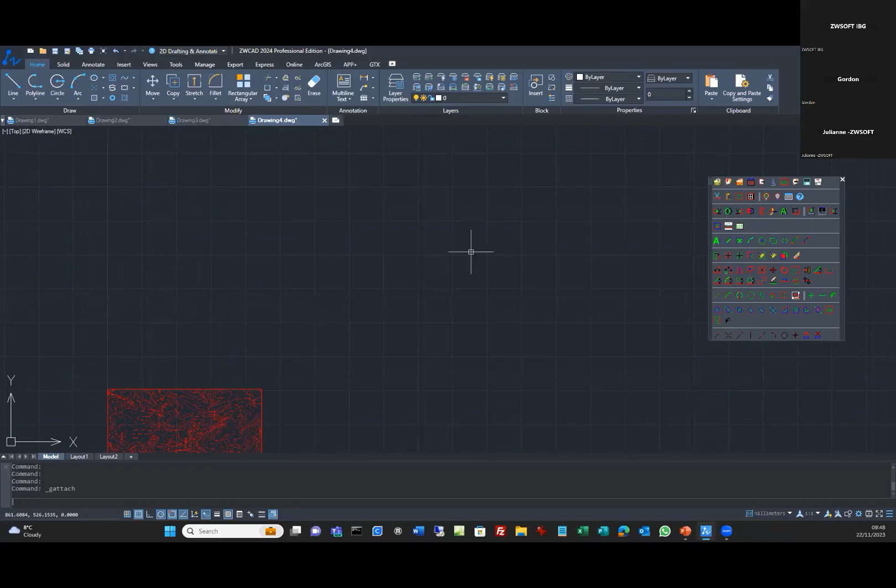If I just open up one more, I'll just show you what we can do as far as the mapping goes. So this is the drawing that we saw earlier in the presentation. So I'm going to turn that through 90 degrees. And if I just use similar as before, I'd keep it on that layer. So raster to vector. If I pick a fence again, you can see that it's traced all of those contours from the area that I was in all the way through the drawing.

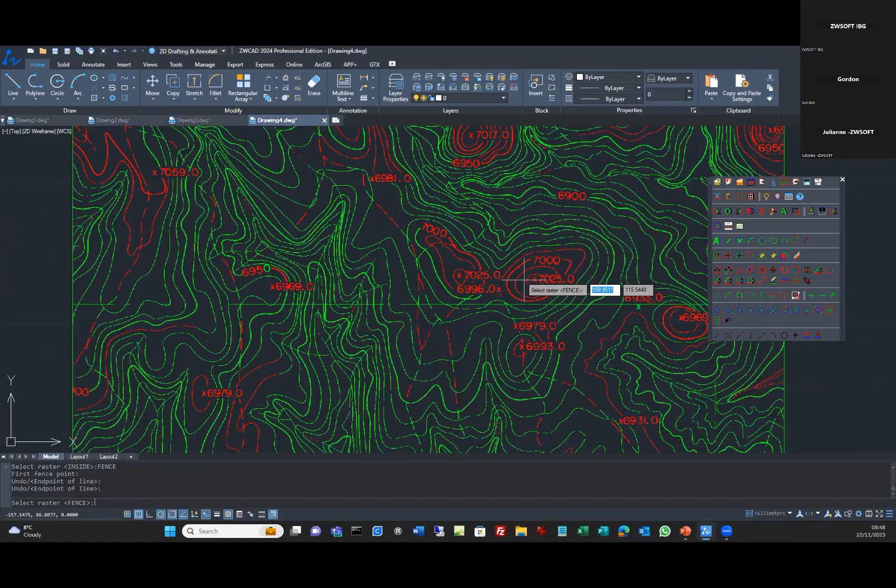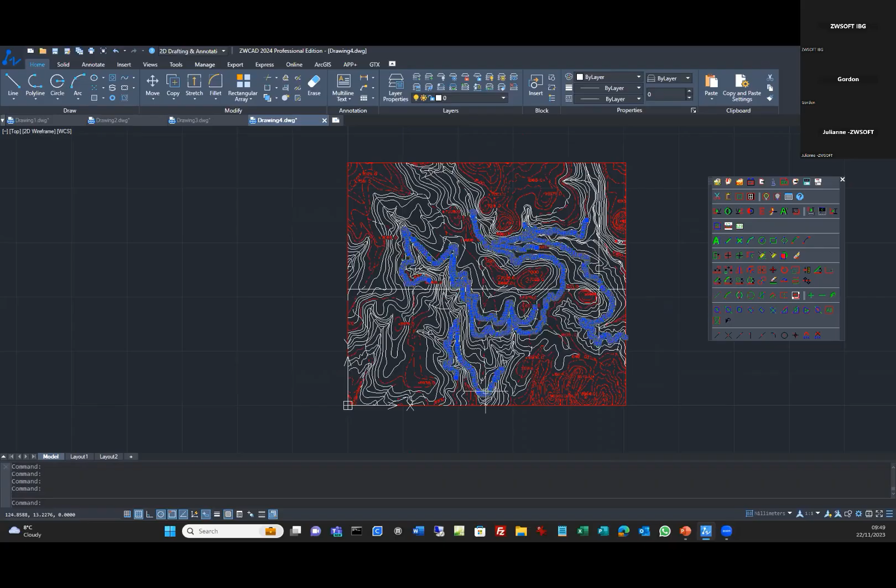I'm going to use contour conversion, polyline, make it as smooth as I can, say okay. So now it's traced all of those contours and polylines throughout the drawing. So like I say, it doesn't matter what type of drawings you have, whether it's a mechanical engineering drawing, an architectural one or a map. We just look at the raster data and we want to then manipulate that data and present it how you want.